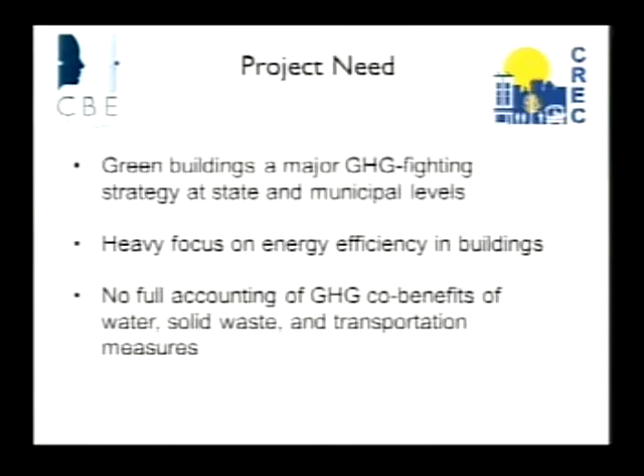But again, there's no full accounting of the benefits of these additional green building strategies. So our goals here were to achieve a more complete assessment of the potential GHG benefits of green buildings, to facilitate progress toward GHG goals by allowing fuller accounting of green building benefits, not just focusing on operational energy, potentially stimulating voluntary actions to reduce emissions by documenting the role of green buildings, and also importantly to inform future building standards setting.

So many of you may know that the state of California, not the Air Resources Board, but other portions of the state, produce building energy efficiency standards, Title 24, Part 6, the now CalGreen Code. These are important in establishing baselines for municipalities to set in their building energy standards. So to the extent we can inform those processes, that's also very valuable.

So just to lead with some of our big findings, and then the rest of the talk is going to be substantiating and describing how we came to these conclusions. We found that green office buildings, compared to conventional construction, are producing about 50% less GHGs due to water consumption. And for those on the web who may not be used to the lingo, GHGs is short for greenhouse gases. I will use that acronym numerous times throughout the talk. 48% less GHGs due to solid waste, and about 5% less GHGs due to transportation.

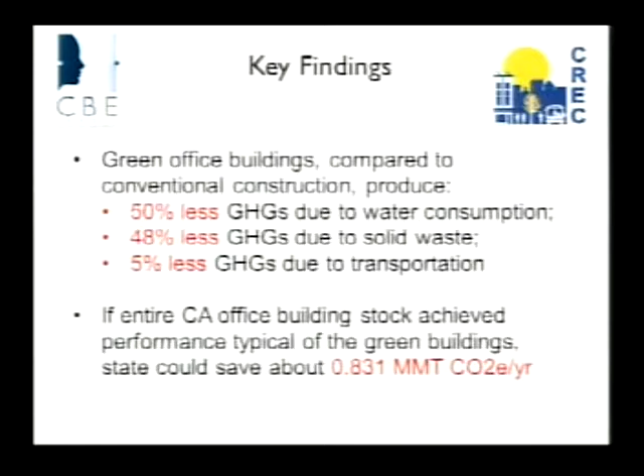If the entire California office building stock achieved performance typical of these certified green buildings that we looked at, the state would be saving about 0.831 million metric tons of CO2 equivalent per year, however you want to look at it. So again, we'll go into detail about how this conclusion was achieved.

Basically, the study is organized around a set of analytical comparisons, and apologies if this is a little bit small for you, but it's an important table. In the left column, you see the names of 3 different values that we measured or estimated as part of this study.

Baseline values are performance of typical non-green office buildings in California. So just something that's constructed out in the marketplace, not striving for a green rating, but is state of the art, meets state standards for construction, but is otherwise typical.

The predicted value, the second one in the middle, is performance expected of green office buildings at the time of certification. And I'll talk a little bit more about why that's significant, but we are studying a set of buildings in our work here that were certified at a particular time. They were certified green under the LEED system, which I'll talk about in a moment. At that point in time, there were certain expectations that were embodied in state policy for how a green building should be performing. So that's what we're calling a predicted value for how this building would be performing.

And then finally on the bottom, the measured value is the actual performance of the green office building.

The whole section to the right there, major data sources, is again something I'm going to go through as we talk here, but these are some of the sources that we relied on for data on each of these cells in the matrix.

So the baseline values for water came from a certain source, the baseline values for waste came from a certain source, et cetera. These are just documented here.

I do want to focus you, though, on the bottom line, where you'll notice that all the measured values came from the same source, which is performance data from certified green buildings that were certified under the LEED-EBOM system.

Which is LEED Existing Buildings Operations and Maintenance. For anyone who's not familiar, LEED is a rating system created by the U.S. Green Building Council. It's a voluntary system. Buildings, when they're constructed, can strive to achieve a green rating under LEED. These are existing buildings undergoing renovation and management changes, and they can also seek to achieve a rating.

A positive rating under LEED-EBOM to certify themselves as green. So LEED as a source of operational data for these buildings has important strengths and weaknesses that need to be talked about at the outset, because they have important implications for the findings here.

So the strength is that this particular form of LEED, the Existing Buildings Operation and Maintenance data set, provides operational data. That's one of the things the buildings have to do to get the rating, is to measure their own performance in many areas, including the three we're dealing with. Other LEED systems, that's not true, because certification occurs at the moment of construction, so the building hasn't operated yet, so there's no data to report.

The weakness is that there is, in LEED-EBOM, very little information on the strategies or the specific actions that the building took to reach these performance levels. They measure performance level, they get a certain amount of credit for that. They also may be striving to improve performance to a certain threshold identified in the rating system.

So for example, in water, as I'll point out in a minute, they can seek to reduce their water use by 30%. They get extra points for that. But it doesn't give us any information on what they did to reduce the water use by 30%, only that they did it, potentially.

We are also focused, I mentioned earlier, on commercial buildings. Because of the nature of this data set, we essentially had to operationalize that as office buildings only. So we focused on office buildings and excluded other kinds of commercial buildings, which vary enormously in their performance characteristics.

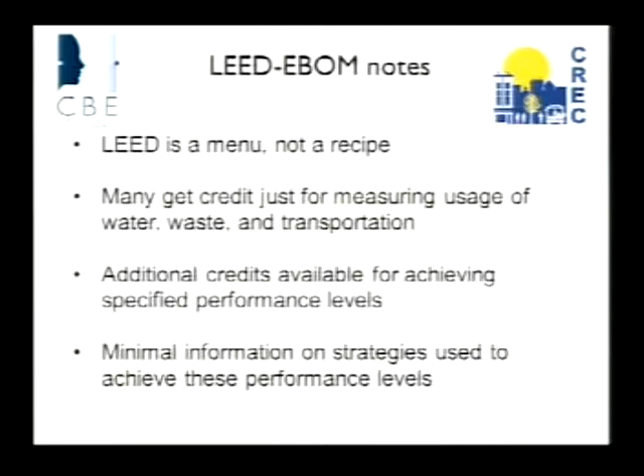In the cases we're looking at, buildings could get credit simply for measuring the usage of water, waste, and transportation, irrespective of whether they're doing anything to reduce those things. But then there are additional credits available for achieving specified performance levels, and I'll talk about that in each individual case. Again, minimal information on the strategies used to achieve those performance levels.

The prerequisite is to achieve either 120% or 160% water usage compared to the 2006 International Plumbing Code. Again, that sounds unambitious, but these are existing buildings that had been built perhaps long prior to that, so bringing it up to roughly a 2006 plumbing code standard actually in many cases is a substantial improvement.

Then water credit 1.1 is simply to meter the whole building's water use and report it. They got a point simply for measuring it.

1.2 is to report on any sub-metered usage. They could sub-meter any portion of the water usage, maybe the irrigation usage, maybe the indoor usage, maybe the cooling tower usage. They didn't have to do all of them. They could just do one and get the credit for that if they reported it.

Then water credit 2 is the one that offers points for achieving up to a 30% reduction in indoor water use. With the materials and resources credits, the MR, which is solid waste in our language, the prerequisite is simply to have a solid waste management plan.

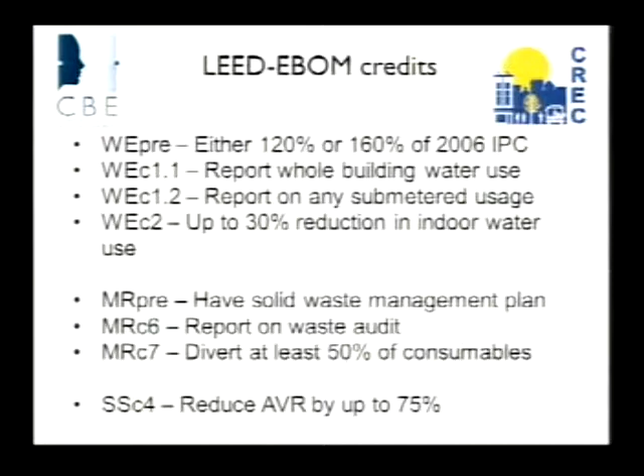So the more people travel by some mode other than the automobile, walking, bus, or carpooling, the higher the ratio will be. If everybody drove their own car to work, it would be a 1-to-1. The AVR would be 1.0. So the higher, the better, the more sustainable in that case.

So this is the data that we have and worked with. For water, we have total usage in the building. We have a very fragmentary set of sub-metered data. Not all buildings sought that credit. Those that usually didn't sub-meter all the systems just chose one or two. And then we've got a certain subset of buildings seeking the indoor efficiency credit, the 30% reduction in water usage.

For waste, we have a diversion percentage as the data point we are able to work with, because the time span of the waste audits was all over the map, and the timing also of them, what point in the week or what point in the year that was done. We couldn't directly compare on the quantities of waste disposed or diverted. We were only able to look at the percentage diverted, i.e. recycled or composted. We also have this data on a smaller set of buildings seeking the 50% goal.

And for transportation, we have average vehicle ridership data.

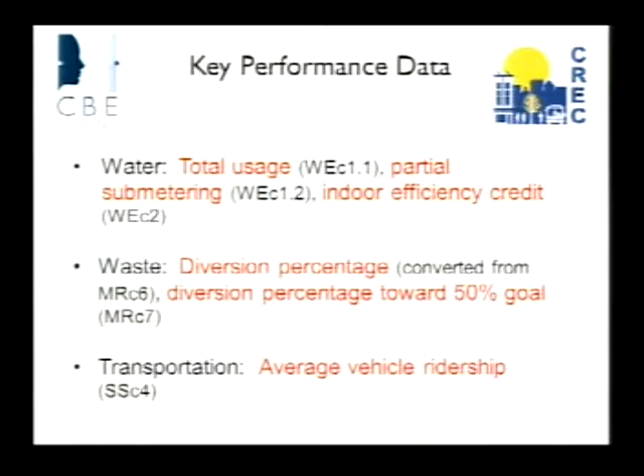Some of these things vary regionally around the state of California, so we had to account for that also. We know there's regional variations, for example, in irrigation demand. It's hotter inland, and there's more evaporation inland than on the coast. The energy intensity of water varies around the state. It takes a lot more energy to deliver water to Southern California than it does to Sacramento, where you're basically pumping out of the Sacramento River.

There's almost nothing required to deliver it to buildings in the city. And then regional transportation infrastructure also varies quite a bit. The Bay Area has a lot of rail systems and bus systems. Sacramento has a good share as well. San Diego, not so much. So there's a lot of variation that has to be accounted for.

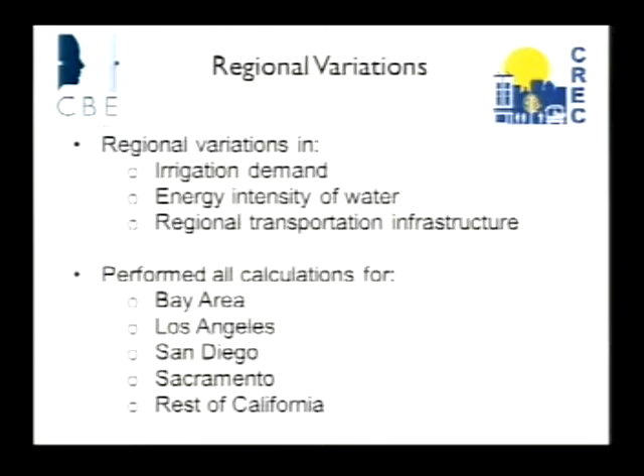So we performed all the calculations you're going to see for 5 regions of the state. Basically, the big 4 metro areas, Bay Area, Los Angeles, San Diego, and Sacramento, and then a 5th region, which was called Rest of California and encompassed everything else.

So this is the size of our data set then, broken down by the 5 regions. For the transportation data, we had 196 buildings after we cleaned the data set and took out the buildings that, for whatever reason, the record didn't make sense. For water, about 191, and for waste, 233.

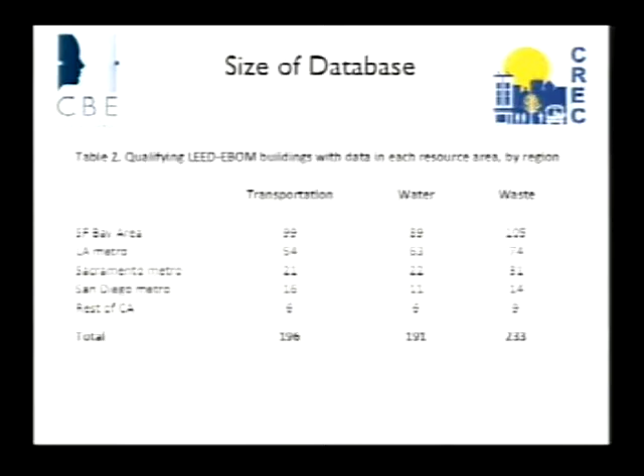So that's sort of all the big picture. Now I want to talk through, and I hope to not go into numbing detail, how we derived baseline, predicted, and to some extent measured values for each of these resource areas. And also how we looked at the greenhouse gas intensity of usage, which is a fourth factor that has to be applied to all of these things to get a GHG footprint for these usage levels.

So we'll start with water. For baseline water use, there are essentially 2 good studies out in the literature that we were able to uncover, one of which had 2 different approaches to the question.

On the slide here, these are expressed in gallons per square foot per year of usage in the building. You can see how drastically these vary - from one study from the American Water Works Association finding over 500 gallons per square foot per year in the left column, over to the rightmost column, one of the 2 approaches taken by the Pacific Institute, finding only 108 gallons per square foot per year.

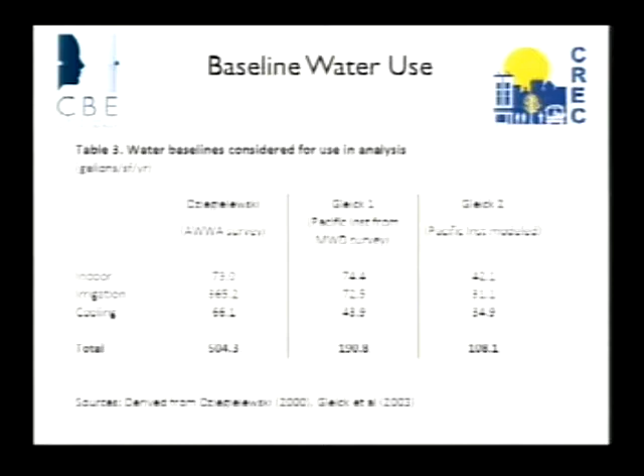We used the most conservative of these 3 baselines, i.e. the one on the right, because we knew we would be comparing the performance of green buildings to these baselines, and we wanted to be as conservative as possible about the benefits we were estimating for the green buildings. So we chose 108.1 gallons per square foot per year.

Predicted water use, as I mentioned, is what a green building at the time of certification was expected to achieve. One useful thing here is CalGreen, the green buildings standard for the state of California, which is now mandatory, but was not mandatory when these buildings were being certified under LEED-EBOM. It had been published, but was not yet a mandatory building standard for commercial buildings in the state. So we used the expectations codified in CalGreen to formulate the predicted values for water.

So that essentially is a process for indoor usage: identifying the fixture and fitting standards in the plumbing code, the rates of usage associated with that, and the population in the building, to achieve an overall estimate of what the indoor water usage from a certain size of building will be as a result of those plumbing standards. That's for indoor use.

Then there's also irrigation usage, which again varies considerably around the state. CalGreen refers applicants to the Department of Water Resources Water Budget Workbook. So we used the same source to estimate for the regions. We chose the biggest city in each of the regions to determine what the irrigation demand would be. And then we expressed that per building square foot as opposed to per square foot of land being irrigated - an important distinction that changes the numbers quite a bit.

For measured water use, I mentioned we had this sub-metered data, but the sub-metered data is fragmentary. It would have been very handy if all the buildings that sub-metered had done all of the possible configurations - I think there were 5 possible sub-metering configurations - indoor, irrigation, cooling tower, process water, et cetera, and had a complete set. That would have provided a lot of mathematical simplicity for us. But we had this fragmentary set.

So instead, we had the measured water usage for the building, but wanted to distinguish between indoor, irrigation, and cooling tower usage, because the irrigation in particular is a big driver of overall usage. So we calculated the average total building usage for all buildings, then calculated average irrigation usage for buildings sub-metering irrigation, and average cooling tower usage for buildings sub-metering cooling tower usage. Then we imputed the average indoor usage by subtracting the irrigation average and the cooling tower average from the total building average. Those results were then broken down by region.

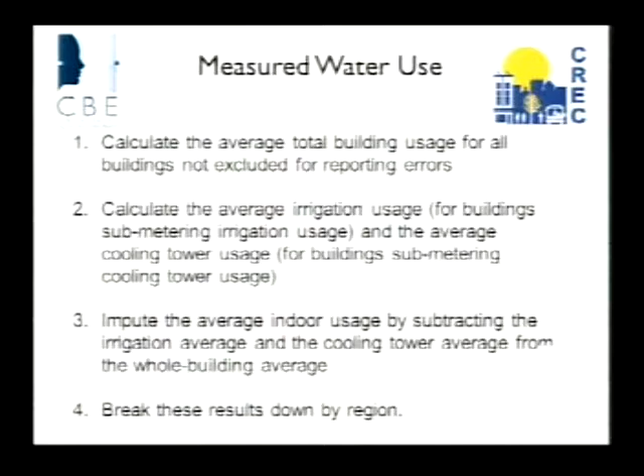We had to assume something about the origin of the water. Every region gets water from many different locations, and the energy intensity of those supplies differs considerably. So we took what's known as a marginal water approach, assuming that as water is saved, the water utility...

...will cut from certain sources first. It won't be a portfolio-wide average. It will be a certain source that's either the most difficult to get, the most unreliable, the most expensive, what have you. That's the one they'll give up on first. That's a standard approach in water-energy studies.

And we, in general, assumed the same marginal sources as other studies in this vein have done. We also assumed that for those sources we would take a marginal energy approach, so that as energy is saved, as you give up water imports, the energy utility is also cutting from its most unreliable or most GHG intense source first.

So these GHG intensities of water were then applied to calculations of the GHG footprints of baseline, predicted, and measured values of water. We'll get to the results of everything in a couple minutes.

The baseline for solid waste is much simpler. There's basically only one good resource for uncovering this information, which is studies done by CalRecycle, essentially statewide waste audits. The waste generated by large office buildings is conveniently estimated at 1,998 pounds per 1,000 square feet, almost exactly 1 ton per 1,000 square feet.

But the best baseline information on diversion rates was found in this 2006 CalRecycle study, which found that among office buildings, only 7% of the ongoing consumables were being diverted at the time of this study. Now it says 47%, the largest piece of the pie, could be easily diverted, i.e. it's probably office paper and other things that aren't being recycled reliably.

But on the basis of this one study, which really was the only good one, we established the baseline diversion rate at 7%.

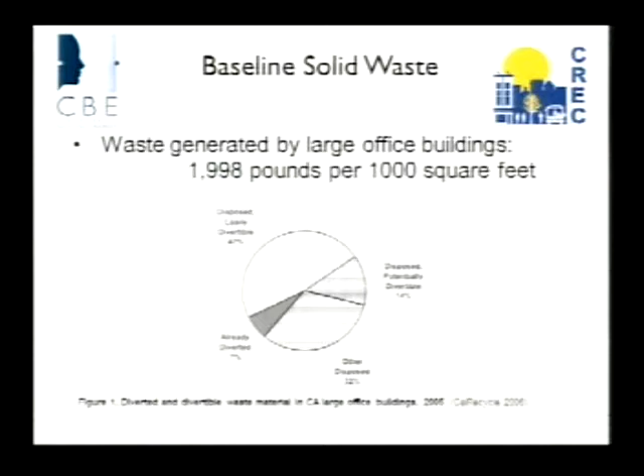At the same time, Assembly Bill 341 was being passed, establishing a 50% diversion rate goal for jurisdictions, not for individual buildings, but for jurisdictions. And we took the liberty of assuming that that represented a reasonable aspirational goal for green building at the time.

Again, at the time of the certification, now that would probably be seen as unambitious because the state has new goals on the books. But in 2010, 2011, that was the goal, and folks at CalRecycle and ARB agreed with that. So our predicted solid waste diversion rate was 50%.

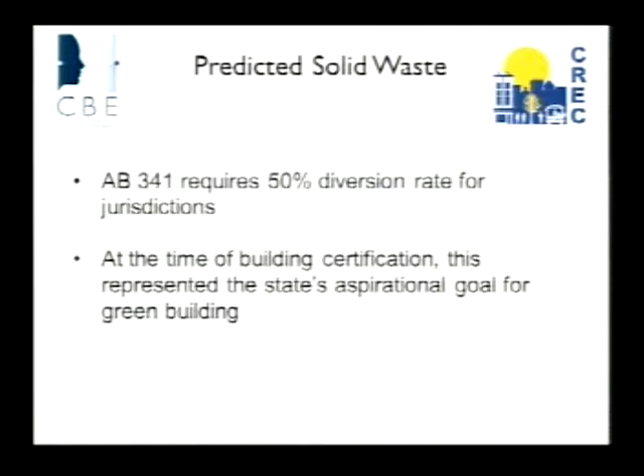For measured solid waste, again, we had these waste audit data. These are organized, each row here is a building, and they're stacked by their diversion rate, the lowest at the top and the highest at the bottom. Disposal and diversion rates are complements of each other, so they sum to 100%. That's why the graph takes that nice flowing shape, because the total width of every bar is the same.

And the fact that you can't read the details on this is actually fine, because the squint test tells you what you need to know, basically, which is that of the waste being disposed, much of it is that pale green color, representing wet waste, food and so forth being disposed. And on the right, what's being diverted, i.e. recycled, is mostly the red, which is mixed paper. So in an office building, that's not terribly surprising.

But at any rate, we have this diversion percentage data, and again, we'll talk about that more in a couple minutes. Solid waste has a greenhouse gas intensity.

We used formulas from the landfill emissions tool that is in use by ARB and other state agencies. Based on the graph you just saw, we assumed that about 70% of the landfilled waste was wet waste, and about 30% was paper. We also assumed the landfills have gas collection systems, i.e. methane systems. Not all of them actually do, but we wanted to be conservative in terms of the GHG impacts we were attributing, so we assumed about two-thirds of the landfills in the state have them. The rest have state incentives and policies to put gas collection systems on them.

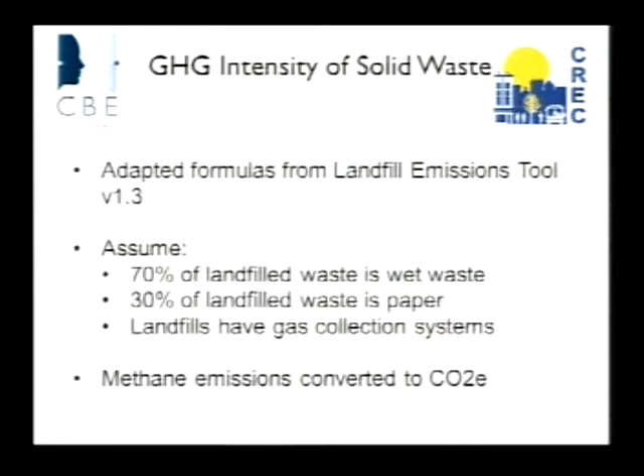For transportation, we have a process that we actually invented whole cloth, because most transportation studies do not focus on average vehicle ridership. Most of them focus on vehicle miles traveled, which is actually the more directly relevant measure for greenhouse gas impacts, because emissions are basically directly proportional to how much petroleum is combusted or electricity is used to move a vehicle. But the average vehicle ridership data is what we had from the LEED-EBOM set, so we had to think of a way to create a baseline for AVR for a region and also a predicted value.

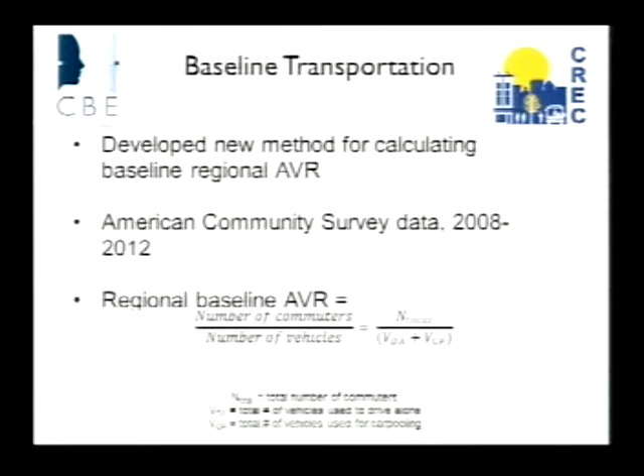For the baseline, we turned to the American Community Survey data, an operation of the U.S. Census that collects data on commuting patterns annually, aggregating it in 1, 3, or 5 year chunks. We looked at the span from 2008 to 2012, and the regional baseline AVR for each region is basically simple addition and division of the data, the number of commuters over the number of vehicles, adjusting for the fact that there's carpooling. That's essentially what that formula says.

That led us to discover what I think is the first time this has ever been calculated, the baseline average vehicle ridership for these major California regions. Unsurprisingly, the Bay Area is a bit ahead of the others. The BART system is 40 years old, there's greater density in the office core, at least in San Francisco, than in many other parts of the state, and there's Muni, Caltrain, bus systems. There's a lot more pre-existing transit infrastructure than in the other regions, although LA is catching up as quickly as it can in terms of that investment.

Our logic here is that a typical building, remembering that the baseline value is sort of the typical office construction, is assumed to be located in a typical, average location within the region, so that the AVR of the building would be reflective exactly of this regional baseline, this regional average ridership.

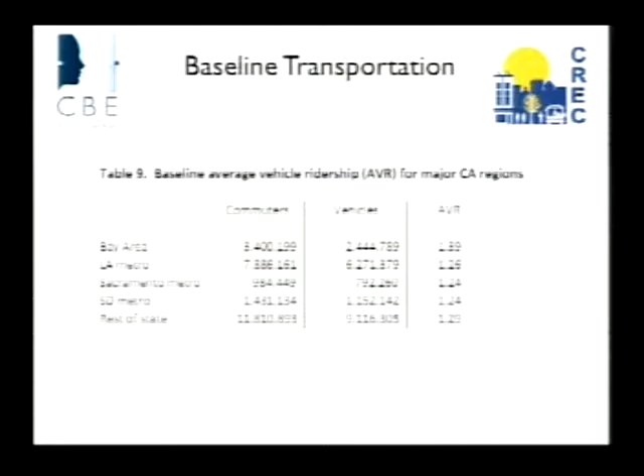Producing a predicted value from that is also really a function primarily of location. Fortunately there's a formula in the guidance from CAPCOA, the California Air Pollution Control Officers Association. They have a manual of techniques for estimating greenhouse gas emissions impacts of various strategies, green building strategies, and other things, and they present a strategy for calculating the mode share of transit as a function of distance of the destination to transit.

So how close the building is to rail stops is expected to increase the rail ridership, the mode share, i.e. the proportion of people in that building going to work by rail, by a certain amount. That's what that formula basically expresses. We then used it to adjust the baseline regional AVRs according to the location of each building.

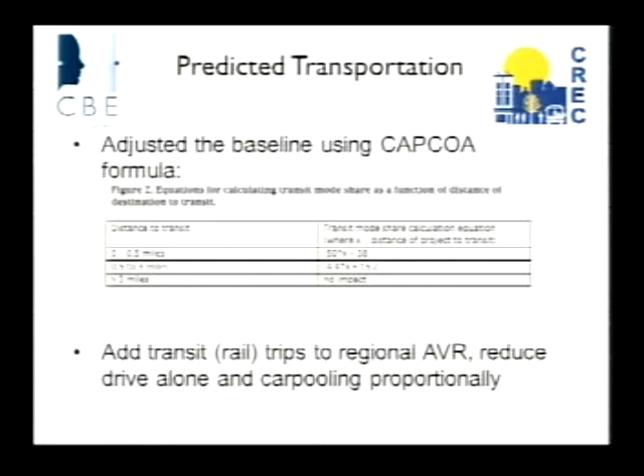We increased the number of rail trips relative to the regional baseline as called for by this formula, based on location of the building. I should point out that's also a conservative approach. It doesn't include things like bus, walking, or bicycling, any other mode. The formula is based exclusively on rail, so we end up with a predicted value for transportation AVR that's lower than we might otherwise expect. In other words, if you had predicted value formulas for all these other non-automobile modes, you'd get a higher predicted AVR than what we're ending up with here.

And then for the measured data, again from the LEED-EBOM system, we encountered the challenge that we didn't actually have the precise AVR for each building. The data was binned. So they would seek to achieve a certain reduction, or certain improvement, in their AVR—the so-called demonstrated percentage reduction in conventional commuting trips. So the column on the left, they can get points.

They'd be rewarded for anything ranging from a 10% to a 75% reduction in conventional commuting trips. So you can think of that as an AVR anywhere between 1.1 and 1.75. But we don't know within each bin exactly what the AVR of each building was. So we assumed that the measured AVR was 25% above the lower threshold of the bin, in order to not be overly aggressive in our estimations.

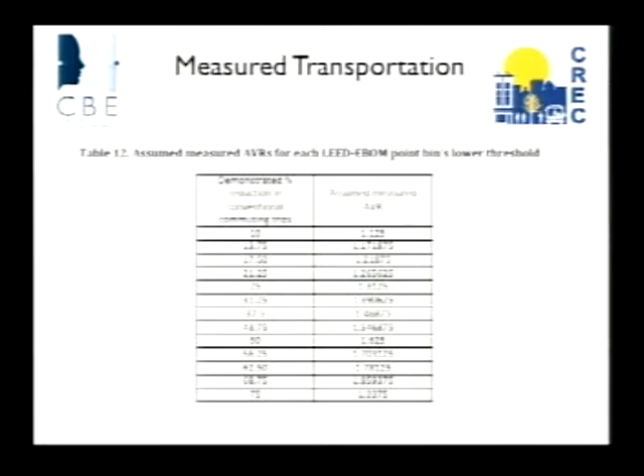To try to be conservative in our estimations. The GHG intensity of transportation—and we'll get to results right after this—is also an important factor. In fact, it's probably the most important factor of all of these we've discussed. So in order to attribute this, we took a weighted average of the greenhouse gas intensities of each of the modes in use in that region, proportional to the regional usage rate.

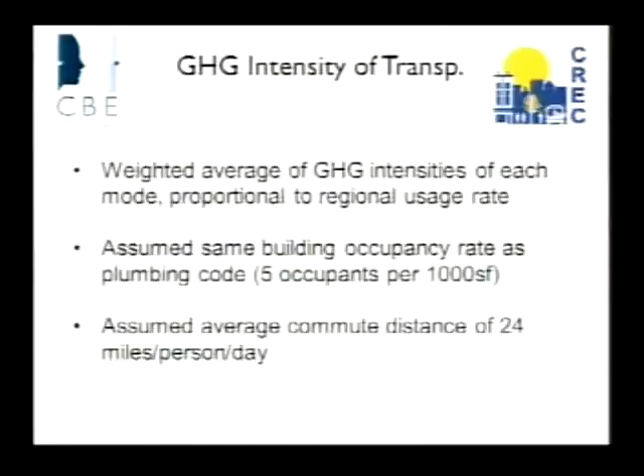We assumed that the building occupancy rates were the same as what is considered standard in the plumbing code, so that's 5 occupants per 1,000 square feet. And we assumed an average commute distance of 24 miles per person per day, which is actually a surprisingly constant value in studies that range through all four of the big metros in California. LA and the Bay Area, surprisingly, are not that different in their average commute distance.

So all of this is essentially needed in order to convert an average vehicle ridership into something which has a GHG footprint and is proportional to the size of the building, and can therefore be expressed on a per square foot basis to be commensurate with the other resource areas.

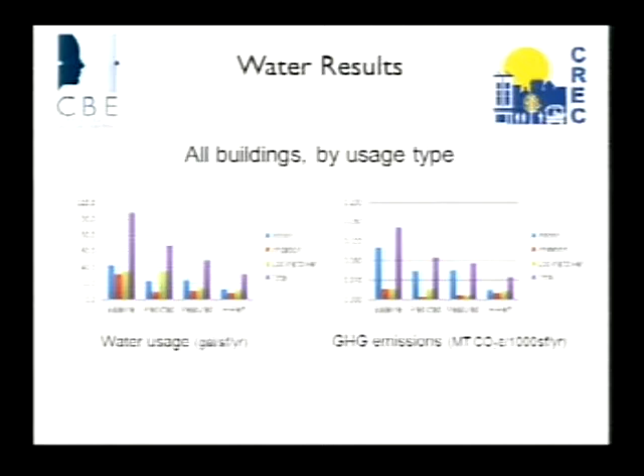An important conclusion of the study is that those buildings actually did even better than that. Their reduction compared to buildings that were LEED certified but not seeking that credit was significantly bigger than 30%, so that incentive appeared to be operating pretty effectively.

With waste diversion rates, the data is a lot less complex because we're basically comparing 7% to 50%, and then our measured value. Our measured diversion rates, shown for Bay Area and LA data along with the blue total statewide figure, come to about 52% diversion - slightly above the 50% prediction, and hugely above the 7% baseline.

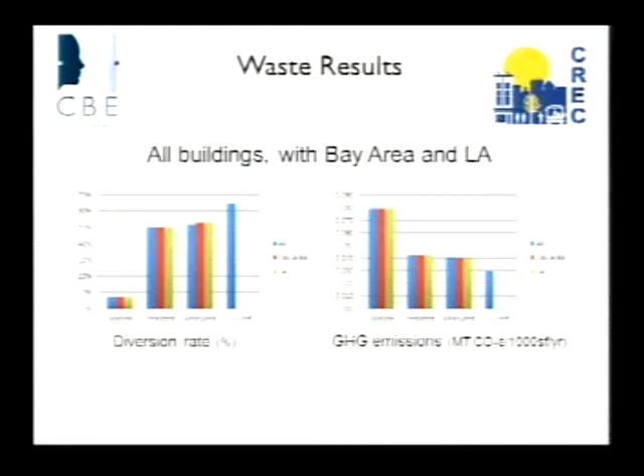The GHG emissions, which are inversely related to the diversion rate since more recycling means more diversion, show very large drops, both predicted and measured, relative to baseline. Again, we have this set of buildings getting credit for 50% waste reduction relative to their own baseline, and again those buildings overperformed that target - so the incentive appeared to be operating effectively.

Transportation results - these are the average vehicle riderships. There's a bit of a different story here: even though we used a relatively conservative prediction method that excluded buses and walking, counting only rail, our green buildings in this data set are not meeting the levels of AVR predicted for them by that formula. The measured values show an improvement over baseline of about 5% in terms of GHG emissions, but fall short of the prediction by about 6%. I'll talk in a minute about the significance of this - you can see the data on the bar chart, and it's also table 17 in the handout.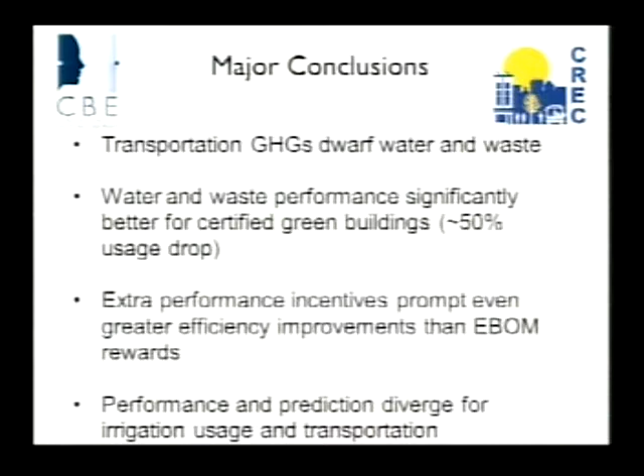I didn't go into a huge amount of detail on this, but performance and prediction were diverging most starkly for irrigation usage as well as for transportation. The buildings did not achieve the level of transportation performance predicted for them. It is important to realize that could be a product of the shortcomings of the prediction method, as opposed to shortcomings of the buildings. You could look at it either way. In fact, we do need to improve our prediction methods pretty significantly.

I described what we did here, but there's a number of ways these could all be improved. Transportation issues in particular, the prediction method is conservative. It is important to realize that buildings certified in other LEED systems may be performing better on transportation than these existing buildings. Other LEED systems are giving points for specific strategies that a green building can take.

You might provide preferential parking for electric vehicles. You might have a van pool program. You might have a commuter savings program. Any of those things get credited under other LEED systems. This LEED system didn't have any of that. It only asked people to measure their performance and, if possible, achieve a reduction in it. So I think it's reasonable to think that newer buildings instituting some of those strategies might be performing better on transportation.

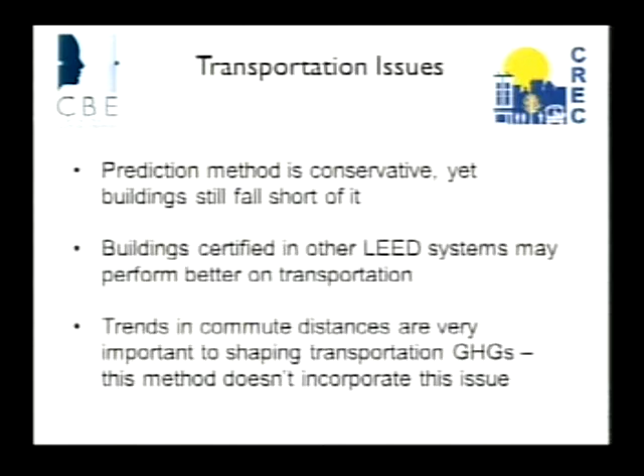And you'll recall that we assumed 24 miles per person per day as the commute distance round trip. But trends in commuting distance are hugely important to shaping transportation GHGs. The greenhouse gases are proportional to the distance traveled, so if you're wrong by 10% on the distance traveled, you're wrong by 10% on the GHG emission estimate. And 10% of this is a big error—it dwarfs the water and waste all by itself. So understanding trends in commuting patterns is very important, and there's been other research done on that.

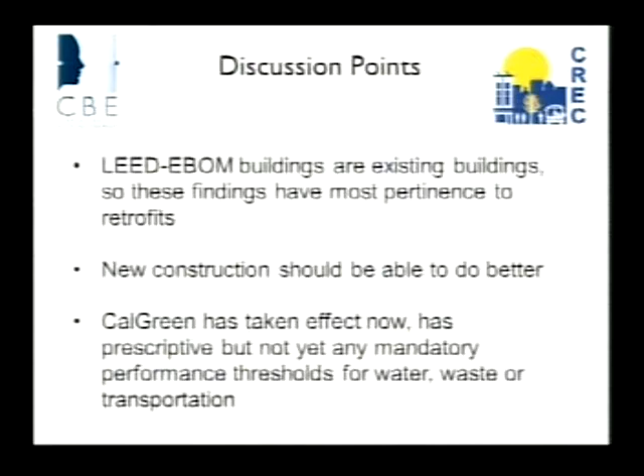I am sensitive to time, and I'll tie up with a couple of extra slides here. The LEED-EBOM buildings are existing buildings, so these findings might have the most pertinence to retrofit efforts. Again, we have 1.14 billion square feet of office space, and it's not going anywhere anytime soon. So as we focus on greenhouse gas emissions in the future and reducing those by 80% by 2050, which is the state goal, we have a lot of work to do on retrofitting that existing building stock.

New construction with existing standards and now the CalGreen system should be able to do better, as well as the continual upgrades in Title 24 Part 6. CalGreen has taken effect now, and it has prescriptive but not yet any mandatory performance thresholds for the three resource areas we're talking about here. So there is room to upgrade CalGreen in future revisions, future updates, to put in some tougher requirements for these three resource areas.

ARB in the 2008 scoping plan established a goal of achieving 7.5 MMT of CO2e per year emission reduction from green commercial buildings, not just office buildings. So the results I was reporting were just office buildings, not including restaurants, hotels, warehouses, educational institutions, and a large range of other commercial buildings that are included in that stock. That goal also includes operational energy, but it doesn't include transportation.

So the results of this study are not really directly comparable with it, but there is a lengthy discussion in the report, if you're interested, arguing that these results are actually consistent with ARB's overall goals, particularly in the water arena, which is the one area that overlaps really directly.

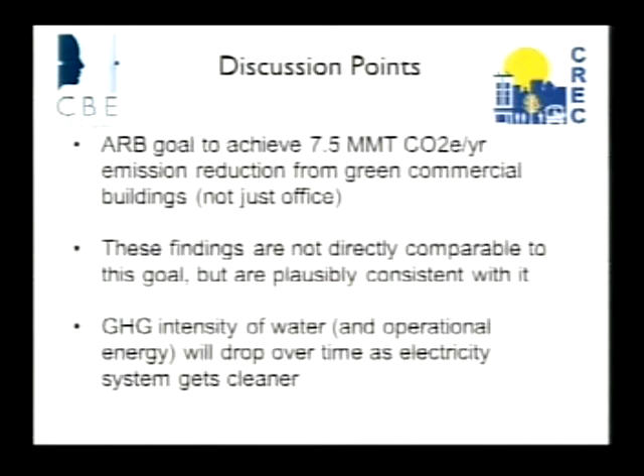Another thing important to remember is that the GHG intensity of water, as well as operational intensity of buildings, is actually going to drop over time because the electricity system is getting cleaner. We're getting more renewables supplying electricity, less coal and natural gas, although natural gas is increasing in the short term but hopefully will decrease long term. So all the GHG footprints associated with those energy inputs will be dropping. In that sense, end-use efficiency will be of declining importance over time relative to other things, not that it's unimportant.

So we're urging, as a result of this, that the state address transportation emissions through CalGreen or other building codes if possible. It's just too big to ignore. If it's 2.5 times the size of operational energy, it needs to be addressed in terms of thinking about the impacts of buildings. We need to improve baseline and prediction calculation methods, especially for transportation, because small errors can lead to big errors.

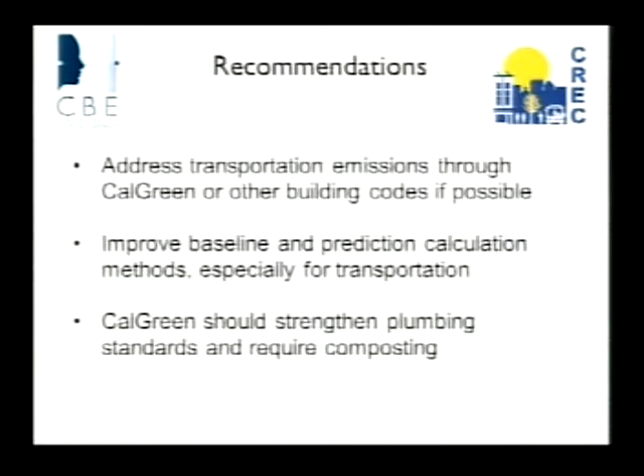And then CalGreen should also strengthen its plumbing standards and require composting facilities in buildings, because as you might recall, a big fraction of those bars for disposed waste was wet waste, i.e. compostable waste. So facilities for that are important for further reducing solid waste leaving buildings.

It's important to encourage all buildings to make performance data public. We could only do this study on green buildings because green buildings take it upon themselves to publicize their data. In fact, the U.S. Green Building Council doesn't require it, but it facilitates the dissemination of operational data from buildings. There's nothing comparable for typical unrated, uncertified buildings. We would learn a lot if we had that data.

We can include questions on water, waste, and transportation in the two major building energy surveys that are done: the Commercial End Use Survey, which is a state survey, and the CBECS, which is a federally sponsored survey of commercial buildings. We also need to expand emphasis on existing buildings in climate planning efforts.

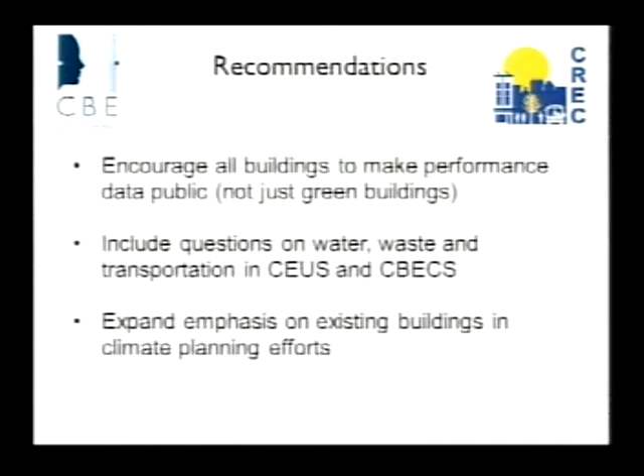There's a lot of policy around new construction. That's what Title 24 Part 6 applies to, and CalGreen largely applies to. There are retrofit standards in each of those codes, but given the size of the existing building stock and its relative inefficiency, there needs to be a lot more effort put into that.

So, time for questions. And I realize I also didn't put my center's web address on here. If anybody's curious about that, it's crec.berkeley.edu. Thank you.

Peter, are you the MC? Okay, question?

So it wasn't clear if the buildings that you used for the predicted values went through the rating system and then were subject to EBOM, or if it was a different set of buildings.

Is that clear? The predicted values were not based on real buildings. They're imaginary buildings. They were just basically using the thresholds of the rating system to come up with those values, and then...

I'm just trying to understand the connection between the predicted values and the measured values. So was it the same set of buildings that you ran through one and then the other, or was that just based on the rating system?

Well, the predicted values are, as I mentioned, derived from these state standards. So there wasn't a set of buildings, there weren't any formulas or specific buildings that generated those. It was based on a policy expression by the state of California at that time of what a green building should be achieving. There were plumbing standards and irrigation standards we utilized, and then a waste diversion standard, which was basically 50%. So they weren't real buildings.

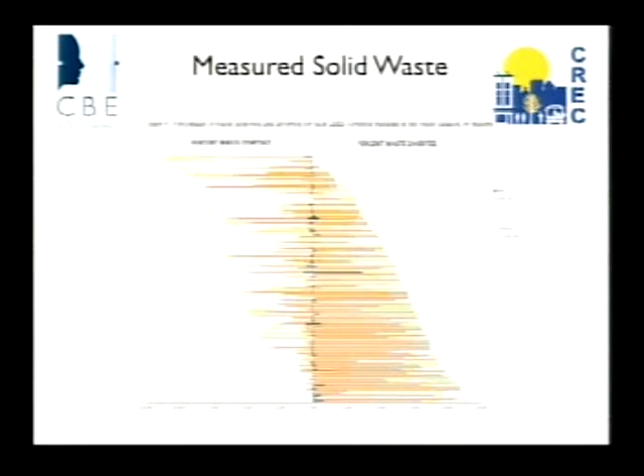And those, Kim, are the 233 buildings? Yeah, Kimmy's pointing out these are the actual 233 LEED-EBOM buildings, precisely from the LEED submittals we collected.

Your question's relevant in the sense that wet waste is a fairly GHG-intense form of waste because it has a lot of degradable carbon, so there's a lot of methane being produced. So it's another area where variations in the input—this isn't so much an assumption, we're inputting based on this data—but if it were different, the methane produced would be lower and the CO2 equivalent would be lower.